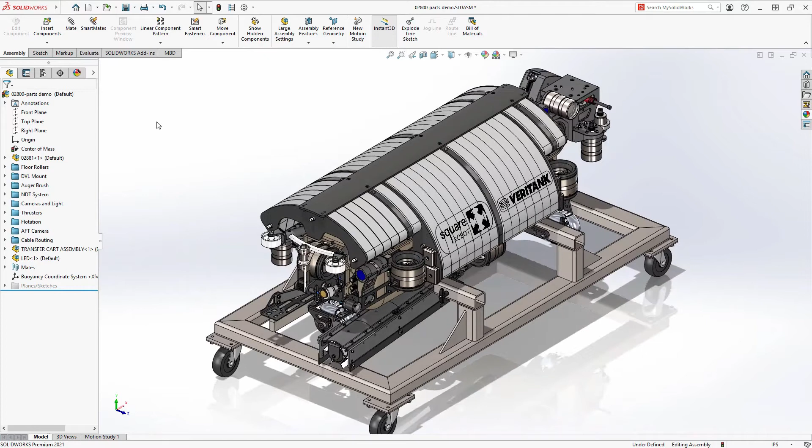SOLIDWORKS 2021 introduces many enhancements to extend the already robust capabilities when working with parts. Let's focus on the parts that we want to work on and take a look at some of the enhancements to sheet metal, 3MF support, and some new capabilities for weldments. And we'll slip in some other enhancements along the way.

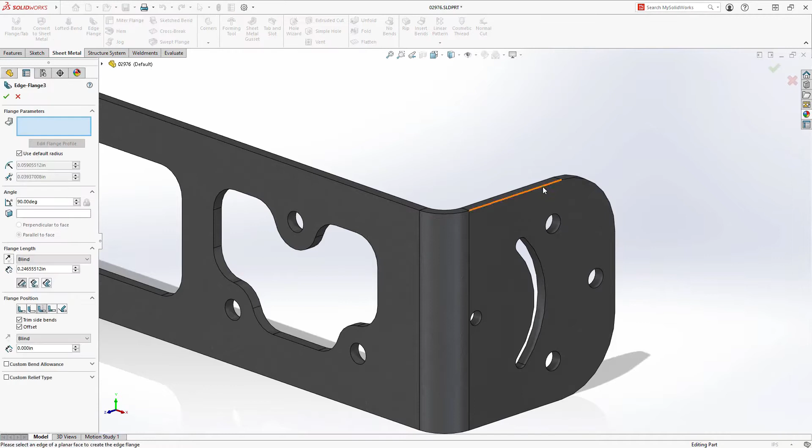When working with sheet metal parts, we've long been able to create an edge flange on curved edges like these on the right, but we're limited to curved edges originating from planar faces. Now, in SOLIDWORKS 2021, edge flanges can be created on curved edges originating from non-planar faces, such as those in the bend area. The preview shows how the edge flange will be created all the way around the part.

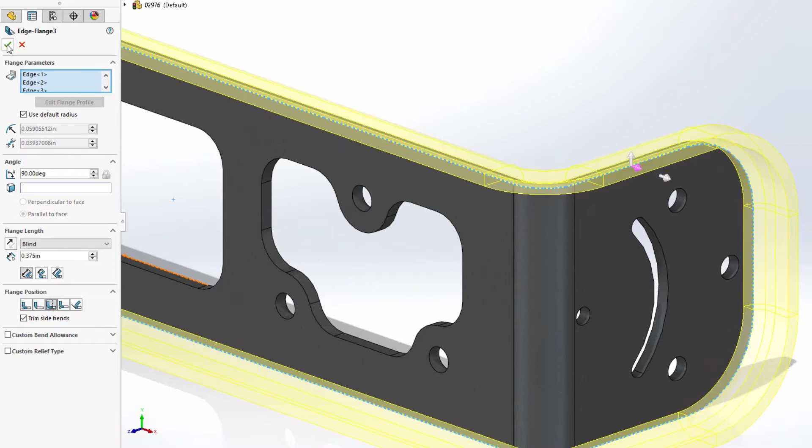Familiar edge flange customization tools are available to help define the edge flange, such as length, angle, flange length dimensioning method, and flange position. This new edge flange looks great and is sure to provide more stiffness to the angle bracket. And of course, this edge flange can be flattened, ready to be detailed or exported to DXF for fabrication.

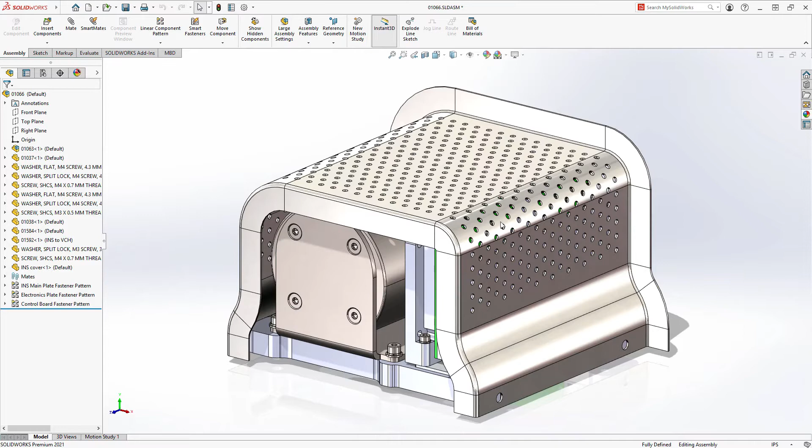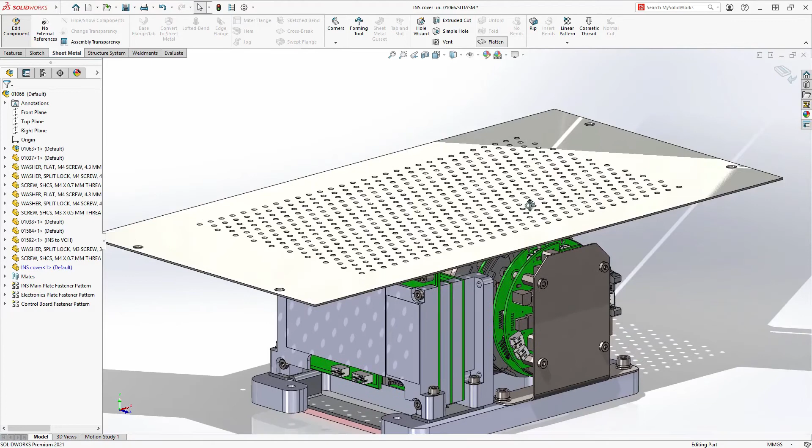This edge flange is great for structural integrity, but it's also useful for enclosures and guarding, such as this cover. The edge flange on the far side needs to protect the components of this navigation control unit. Full editing capabilities are available, so we can change the direction of the flange, as well as the angle to wrap around the internal components to keep them safe. The new edge flange capability along nonlinear edges extends the robust sheet metal capabilities of SOLIDWORKS 2021 for many applications such as adding stiffening ribs and enclosures.

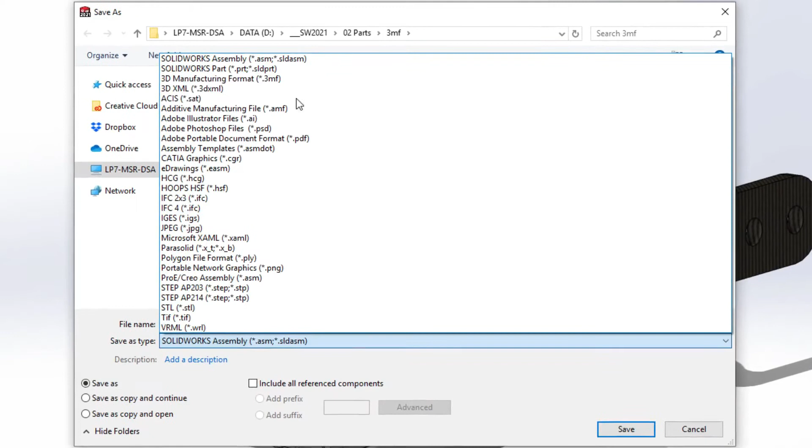This LED light assembly contains parts of various colors, applied textures, and transparency, and needs to be 3D printed. In SOLIDWORKS 2021, support for export and import of 3MF files gets even better. Now, color, textures, and transparency are supported on export. This information is stored in the 3MF file to be used for manufacturing or other applications.

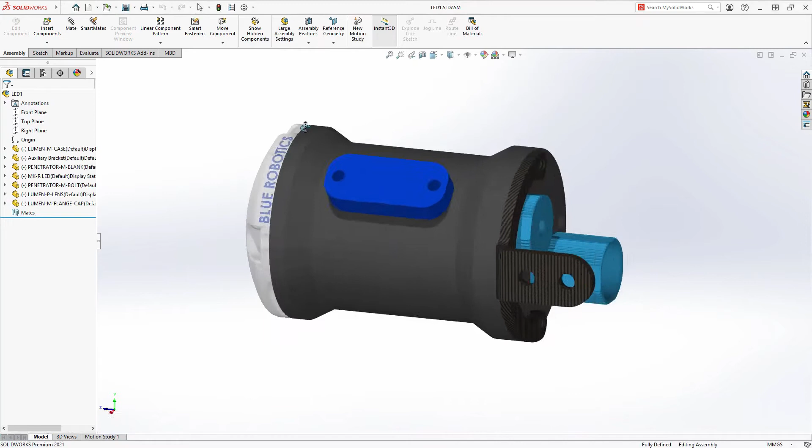When opening a 3MF file in SOLIDWORKS 2021, we now support many more appearances. Per facet and per vertex coloring, as well as textures and transparency, can now be visualized when importing 3MF files as graphics bodies. Additive manufacturing continues to rise in capability and popularity, and SOLIDWORKS continues to embrace these technologies.

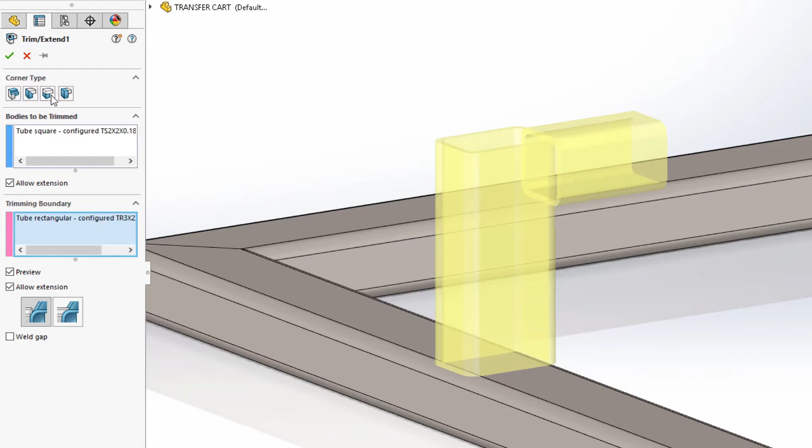When working in the weldment environment, it's common to use various sizes of weldment members. The horizontal tubes in this frame are 2x2 square tube, and the vertical tubes are 3x2 rectangular tubes. The weldment trim extend tool is used to trim the tubes to each other, with various options for the corner type. The two end butt trims dictate how one tube trims to the other, and the miter trim bisects the angle between the two tubes, creating an equal angle miter trim.

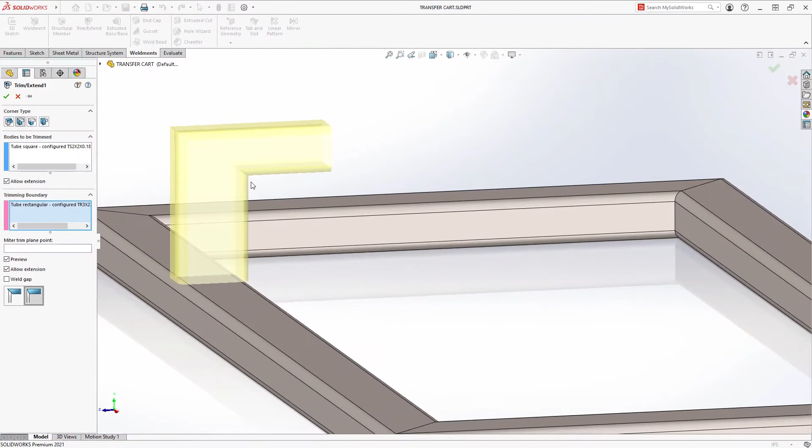Since these tubes are of different profiles, the equal angle miter does not produce the desired result. In SOLIDWORKS 2021, there's a new option for miter trims, the flush miter, which does just that. It trims the tubes so they meet flush. The other vertical members are mirrored, so they update as well.

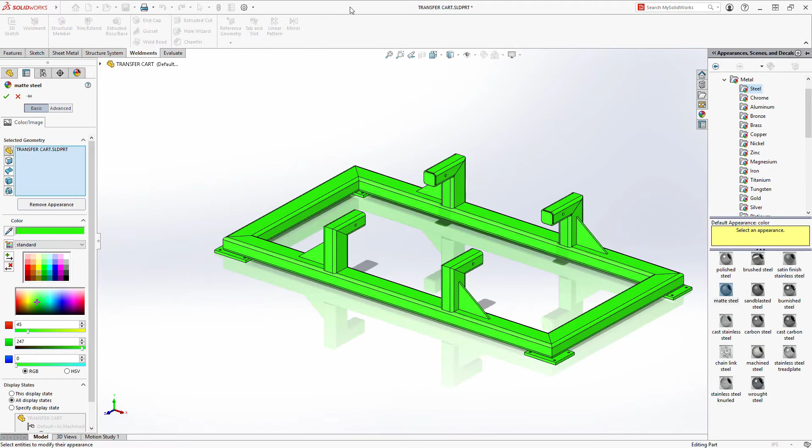This weldment will need to be painted, so let's edit the appearance and choose a color. We have a wide variety of colors to choose from, or we can use the color spectrum to define a custom color. But oftentimes we need to choose specific colors that are dictated by a customer. Let's take a look at the Square Robot webpage. Here we can learn all about their products and their initiatives, but what we really want is the color in the banner on this page.

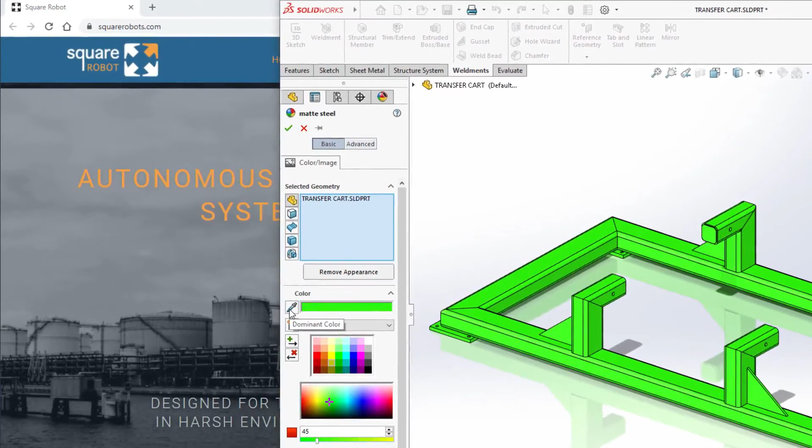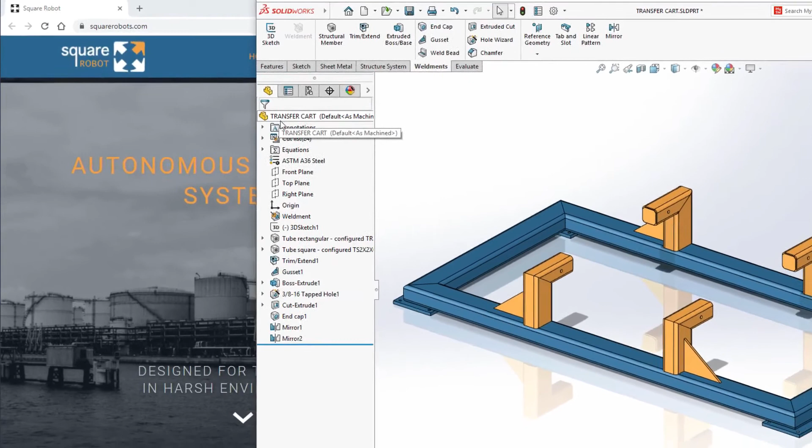Now in SOLIDWORKS 2021, there is an option for easily selecting colors that do not exist in the palette. Just drag the dropper icon over any area on the screen, and the color under the dropper is applied to the selection. For the vertical members of this weldment, we'd like to have a different color. Let's select several of these bodies, and again, drag the dropper to the orange color in the logo to apply it to the bodies. The new color picker works on any image displayed on the screen, including colors from popular paint vendors and color system websites.

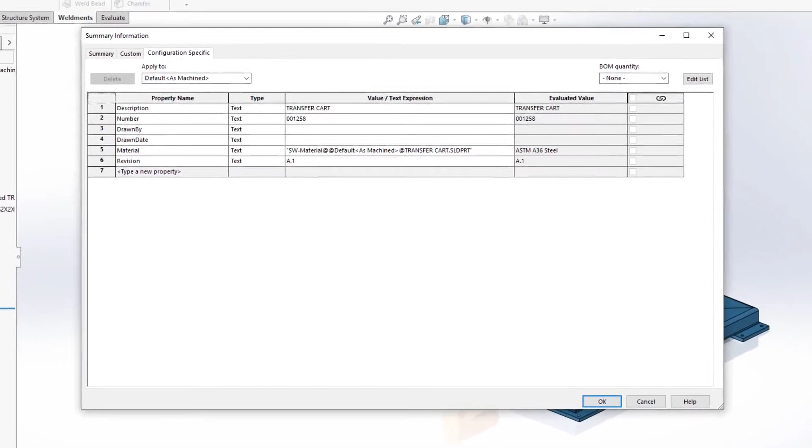Custom properties are a great way to store information about a document, such as description, creation date, or material. These can be leveraged automatically to populate title blocks, bills of material, and PDM. Sometimes it's necessary to calculate a result to define a custom property. Now, in SOLIDWORKS 2021, equations are supported in custom properties. Choose equation as the property type, and you have access to global variables, math functions, and other properties.

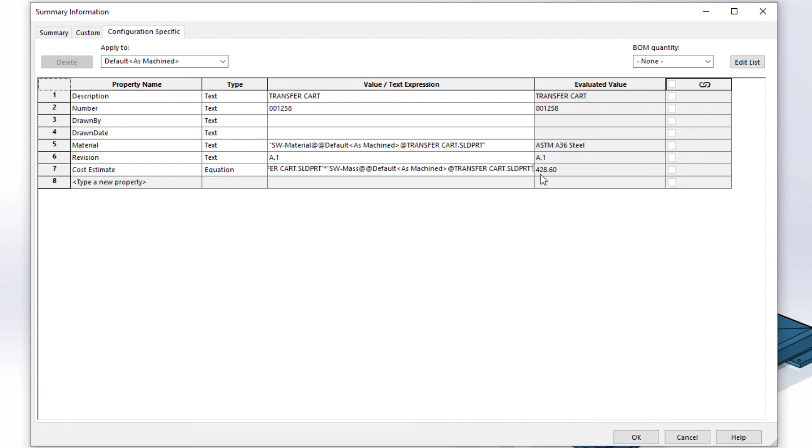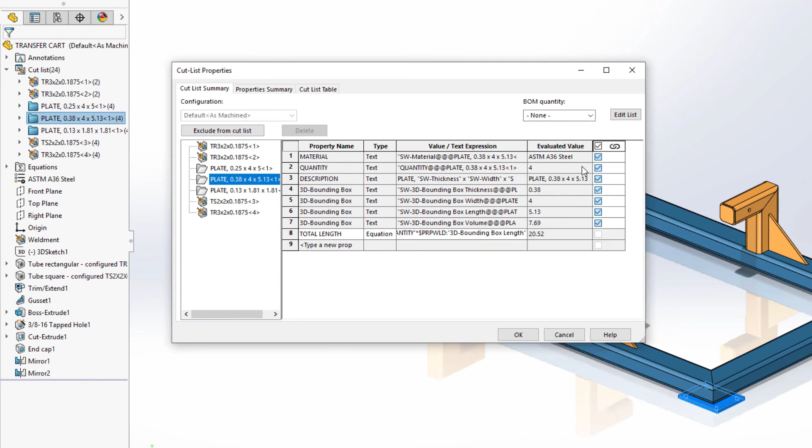For this weldment, we want to define an estimated cost that is based on a global variable, which is an estimated finished cost that is multiplied by the mass of the part. This gives a result of $428.60. Equations can be used in cut list properties as well. This plate in the cut list is used 4 times, and we would like to know the total length of all the plates together. Again, define the custom property name, choose equation as the property type, and for this calculation, we want to multiply the quantity of plates by the plate length, which results in a total length of 20.52.

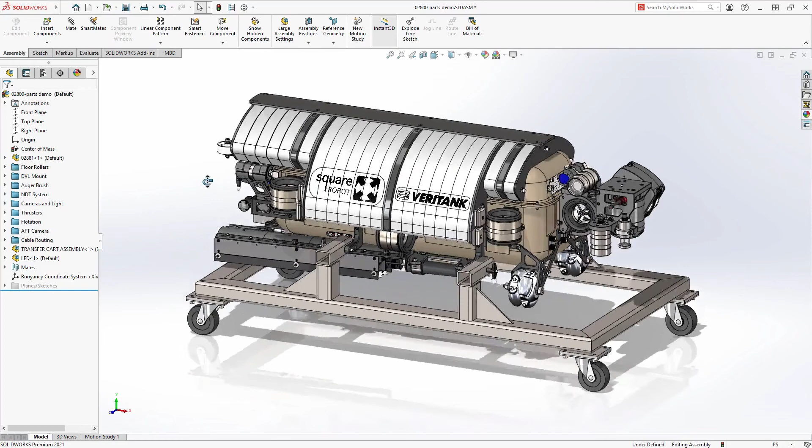Parts are the foundation for creating assemblies. With the new curved edge flanges, enhanced 3MF support, new weldment trims, custom color selection tools, and equations in custom properties and cut lists, SOLIDWORKS continues to enhance the already powerful capabilities when working with parts.